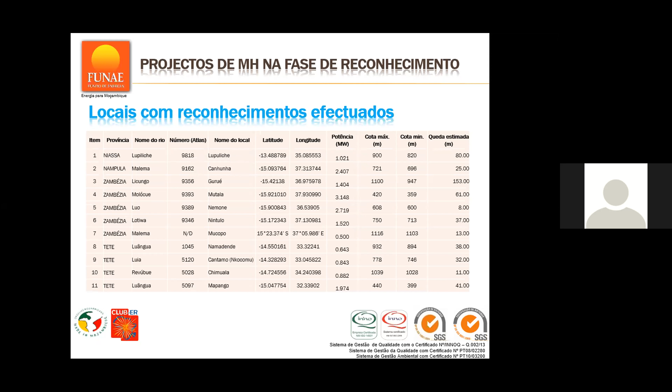Temos projetos com estudos de viabilidade realizados. Temos o caso de Mavonde, na província de Manica, no distrito do mesmo nome. Esse projeto foi desenvolvido sobre o rio Nhamucuarara. Espera-se uma potência prevista de cerca de 900 kW. Aproximadamente, os investimentos previstos, segundo o estudo de viabilidade, são de cerca de 7 milhões e 500 mil dólares. Este projeto está em carteira, o estudo de viabilidade já finalizado, e aguarda-se a disponibilidade de fundos para o investimento.

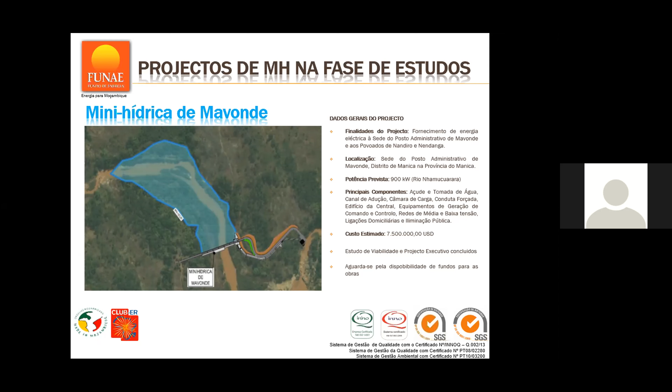Temos projetos em obras. Temos aqui um projeto que está sendo desenvolvido na província da Zambésia, no posto administrativo de Majaúa, distrito de Milange, com uma potência de cerca de 1,9 megawatts sobre o rio Ruo. Aí estão os principais componentes: açude e tomada d'água, câmara de carga, conduta forçada, edifício central, equipamentos de geração. O valor desta obra, que neste momento está em curso, é de cerca de 877 milhões de meticais. O empreiteiro é Soares da Costa, fiscalização da TÉCNICA, Engenheiros Consultores. Essa obra iniciou no dia 14 de maio de 2019 e prevê a sua finalização em 24 meses.

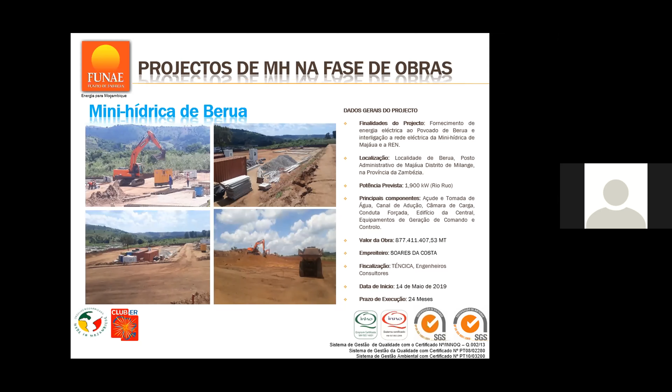Há um pormenor que me escapou aqui na mini hídrica de Berua. A mini hídrica de Berua está interrompida neste momento, porque houve situações de litígio com o empreiteiro que levaram à rescisão de contrato. Esses são os dados iniciais, e nos próximos meses vai ser lançado novo concurso para a construção dessa mini hídrica. Foi rescisão do contrato devido ao fraco desempenho do empreiteiro.

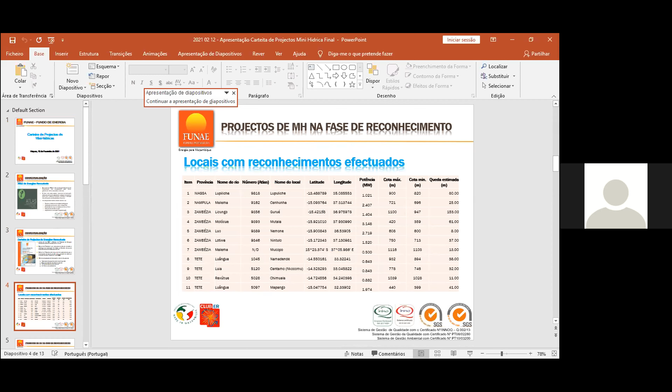Roberto, este campo é interessante. Eu queria também continuar algumas coisas. Por exemplo, estou interessado em saber um pouco sobre a mini hídrica de Sembezeia. Porquê? Porque parece que está muito avançado já. Inclusive, tem 67 ligações de beneficiários feitas. Falaste das unidades de mini hídrica, construção civil, e não sei o quê. Seria possível elaborar um pouco sobre a componente de quem faz as ligações para os consumidores? E não sei se te lembras, na apresentação passada o governo fazia estes projetos e depois lançava o concurso para serem geridos por investidores privados. Queria que elaborasses também um pouco qual é a previsão do FUNAE quando a obra está pronta, se já existe um plano.

Essa é uma questão também muito importante aqui. O FUNAE é uma entidade implementadora de projetos de energias renováveis, incluindo mini hídricas. O FUNAE faz a contratação de empreiteiros, faz a contratação de fiscais para a execução das obras. Neste momento não há nenhum instrumento legal que estabelece os modelos de gestão das mini hídricas. Então, neste momento, o FUNAE é que faz a gestão direta, ou seja, tem técnicos contratados pelo FUNAE que fazem essas atividades.

Mas, no futuro, provavelmente, poderá haver instrumentos que permitem a gestão através de privados. Portanto, não há nenhum instrumento neste momento, mas está na perspectiva do FUNAE privatizar os projetos das mini hídricas, terceirizar os projetos para a gestão de privados, ou também a partir do princípio do público-privado, por exemplo. Então, essas são as novas estratégias que poderão se estabelecer no futuro.

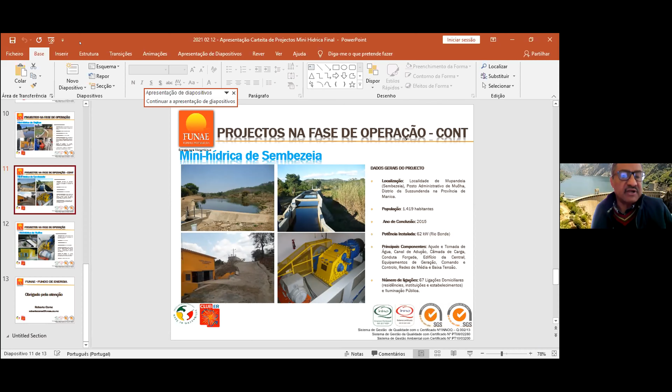Mr. Roberto, can I ask one question? Regarding your mini hydro project design, for example, you have a project called Berua. The capacity of Berua is around 2 megawatts, yeah, 1.9. So what is the design discharge? What I mean is, can 2 megawatts be generated, or 1.9 generated all 12 months, or in some months is it lower than 1.9? What is the water availability or design? I think in dry season, I recognize that this power will not be possible to generate. I think 1.9 will be the maximum power.

Okay, in dry season, how much? 50% or 70% of capacity? How much, more or less? 70, 50%? Okay, no, 70%. 70%. Okay, that's okay.

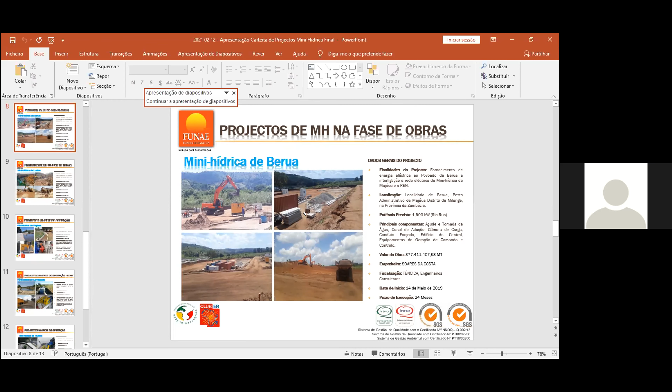But I think if you consider mini hydro, this cost is not so bad. The reason I say this is, last Wednesday we had a very nice presentation and discussion about tariff and mini grid. I think your mini hydro project, compared to the tariff that they presented, is quite, I would say, competitive. Of course, you have to do the detailed analysis: financial, economic, revenue generation, and all the cost. But it is not so bad. This is my observation. So do you agree?

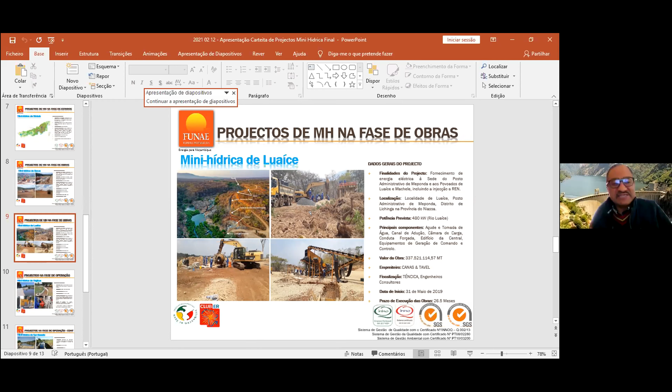I think we can proceed, Divas. Yeah, so let me just share some slides. This will just add to Mr. Roberto's presentation, which, as I said, I did not understand everything, but I find it quite nice.

Sorry, share the... just give me one minute, please. I don't know what happened. Okay, all right.

Okay, you can see my screen. Yes, Divas, okay, thank you. Today, I mean, maybe we have 10 minutes before we end the first part.

Thank you, Mr. Roberto, for making this presentation on the project portfolio, the FUNAE project portfolio. It was very useful. I just prepared a few slides on this. Mr. Roberto, this report I found on the internet - is this the same project portfolio report you referred to in your presentation?

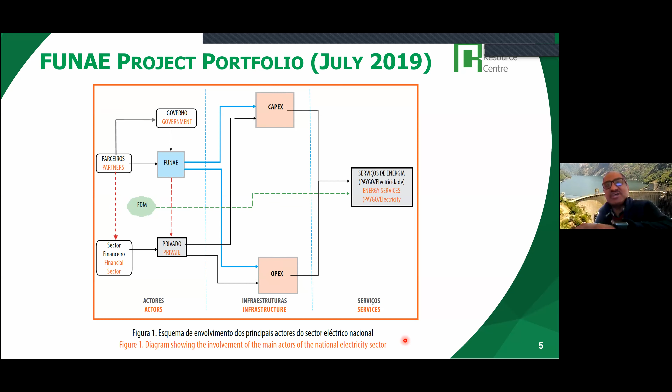I also collected the list of baseline projects - 5 projects with pre-feasibility study, 2 projects with feasibility study, and 2 projects in the Atlas which are now under execution. Basically, from this, they were focused on some provinces - I think it was given that there were 5 provinces - but I just put these projects in the portfolio on the map of Mozambique.

If you noticed, the background map is the elevation map, because obviously for mini hydro you need some head, an elevation difference. There are a number of projects in the Zambezi river basin part of Mozambique, shown as red dots. The blue ones are the two projects - Luahi and Berua, forgive my pronunciation. The dark black ones are the projects with pre-feasibility.

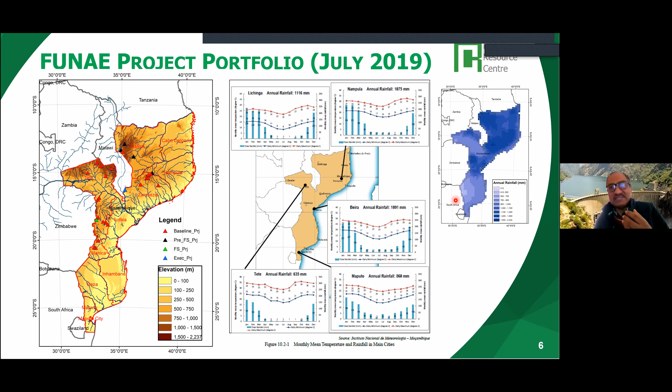So this was the list I got, and as I mentioned, the per capita cost of these 2 projects was for the mini hydro, 5,600 and 7,400. And I noticed there was one big project, I think Mr. Roberto presented, where the cost was much less. But you see, when it's a small project, the cost in the feasibility study is quite high. I'm not sure, maybe this cost also includes the mini grid.

Yes, it includes the mini grid. So this other one probably does not include the distribution network. So this is something that now is a policy regime that has to be decided. I just wanted to present that to you.

Based on that, I think we are running about 1 hour. Maybe we can break now, but based on Mr. Roberto's presentation and some slides, I just wanted to ask randomly: what do you think should be the criteria for selection of these mini hydro projects for prioritizing them? You have 31 more. This is also important. Maybe we can break for 10 minutes, then you can think about it, and when you come back we can spend a few minutes on this criteria. Is the criteria that was given good enough?

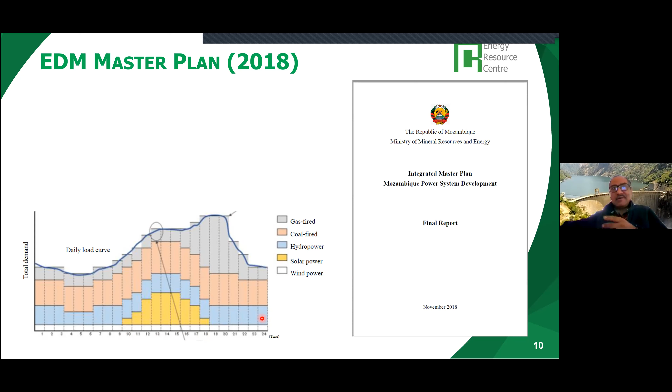And now you are meeting the peak load with gas-powered fired plants, but also the other loads of peak. You also have coal-fired plants meeting this. And you have hydropower here. So at the moment gas and coal is the majority, and this is the solar power which starts from 9 o'clock to 5 or 6 o'clock. So this is the sort of economic dispatch, what they call it, okay?

And this is the existing power generation from hydropower. According to this report, you have Cahora Bassa, Chicamba, Mavuzi, Corumana Hydro, and Cuamba and Lichinga. But I think Cahora Bassa, the majority of the flow is exported to neighboring countries.

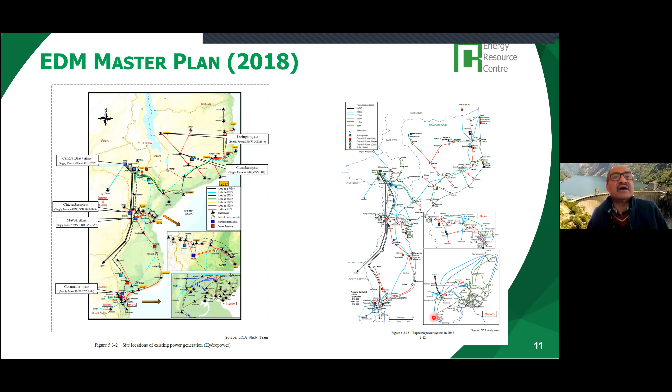So this is by 2042, they have a master plan. This is how they see the power system will expand. And this is the different hydropower projects under construction or completed feasibility studies. I think they have some extension, a second phase of Cahora Bassa. This is the Cahora Bassa description.

Different generating capacity, and I think this is the project that is now under construction, I don't know, Mphanda Nkuwa, and they have this. So these are projects with reservoir storage, and probably this project is under construction, and according to the schedule it is supposed to be completed by 2024. This is a reservoir probably in the Zambezi River Basin. Okay, so it is 1,500 megawatts, relatively large, and it's basically used for base load, it says.

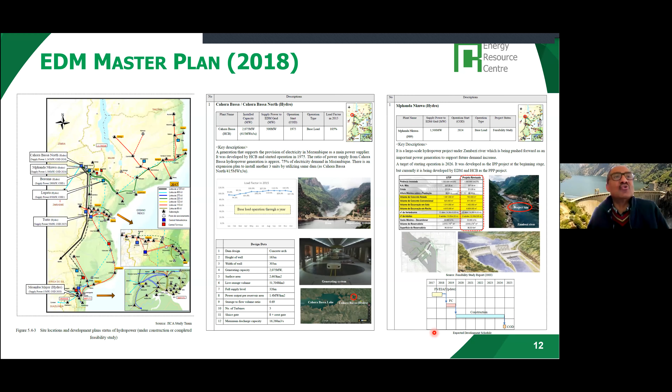Okay, so I just wanted to give you an idea of the overall master plan, and as I mentioned, the load varies from weekday to Saturday and Sunday. So this is 2016, and as I said, normally you have this solar thing. This is the load curve, and solar is in the afternoon. So you need the other sources of electricity like hydro and even gas fired.

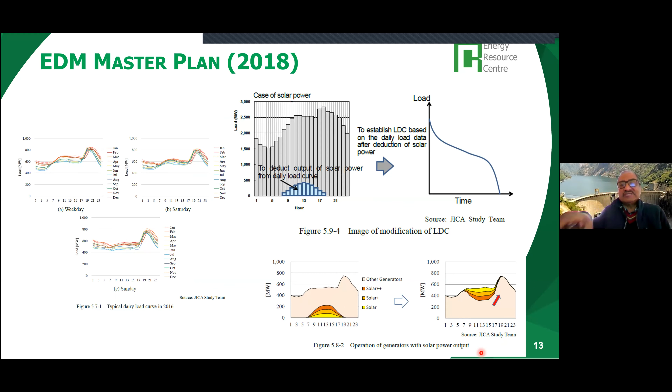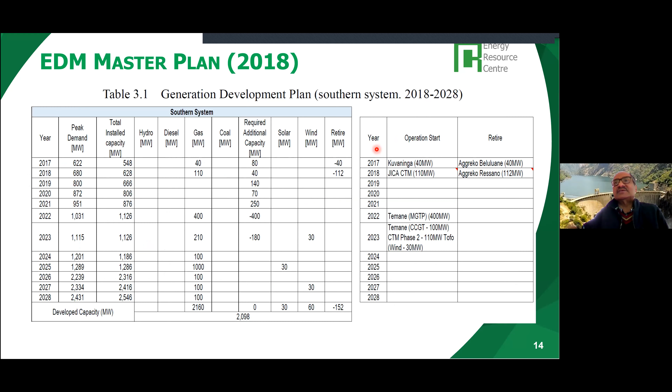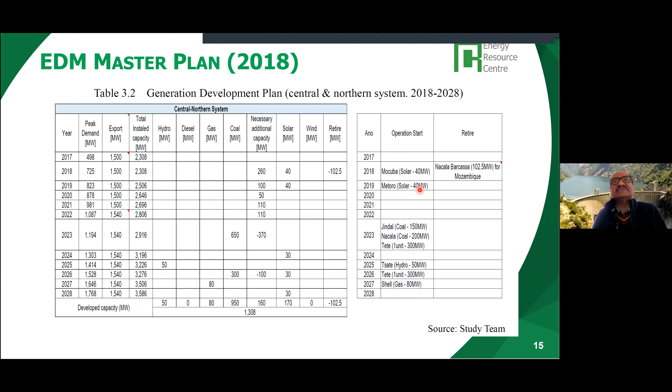And now, by 2029 I think, they want to do a second phase of Cahora Bassa here, and they want to get the funding for this big hydro project.

Sorry, somebody shared. Can somebody share?

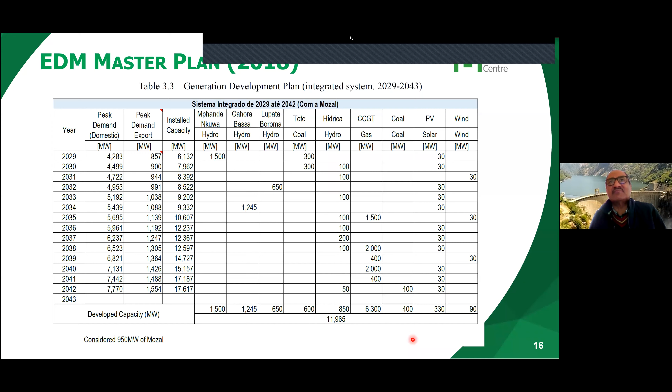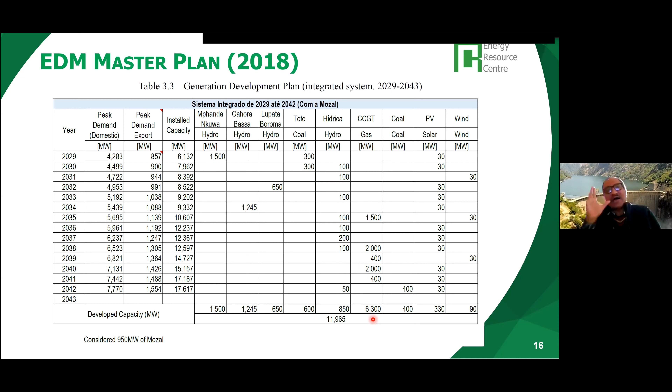Okay, so this is just to give you an idea of how Mozambique is planning their generation development. One thing I want to mention is that the development of mini hydro, mini grids, and the national power system is slightly different. So I just wanted to bring that background.

With that background, I wanted to get your views based on the discussions we've had till now. What do you see as the role of hydropower in meeting the national electricity demand? This is about grid connected systems. The second question is: what is the difference between developing a hydropower for grid connection versus developing a mini hydropower for a mini grid or an isolated system? Do you have any comments on this?

Carlos, was my question clear? I think so, I think it was clear. Of course, I can start.

Yes please, discussing this, I think it's two key questions. Mini grids can be a good source if you know that the river system you are using does not fluctuate very much and does not depend very much on upstream consumption.

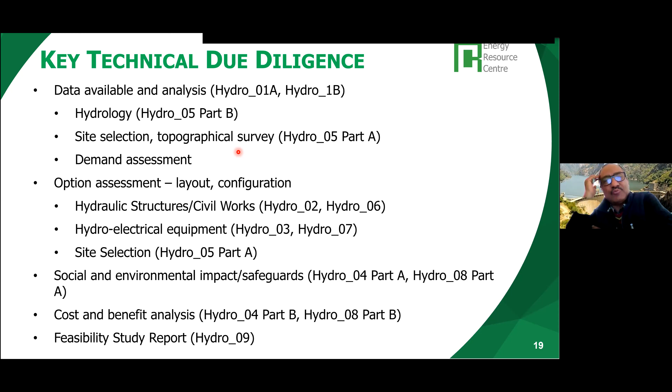Then the other thing is the topographical data, because the topographical maps currently available are at best 1:250,000 scale with contours. This is low resolution. So even for planning-level desk study purposes for a hydropower project, you need at least 1:20,000, or in the worst case 1:50,000, just for planning purposes.

But when doing site selection and a detailed feasibility study, you have to do a topographical survey yourself with theodolites. Nowadays you can even use LiDAR mapping, drones to develop these, and GPS can also be used. So topographical survey data and analysis is very important for site selection as well as design. I covered that in Hydro 05 Part A and B.

Demand assessment is also very important. I covered that in Hydro 05 Part A, I forgot to mention here. As was done by FUNAE, you have to identify the population it can serve, the number of connections, the potential demand, and the commercial, rural and industrial demand. In the national grid, demand assessment covers large industries, tourist services, offices and hotels. But for mini hydro and small isolated hydro, it's rural industries, small scale mining, carpentry, furniture, ice plants, agro-processing plants and other things.

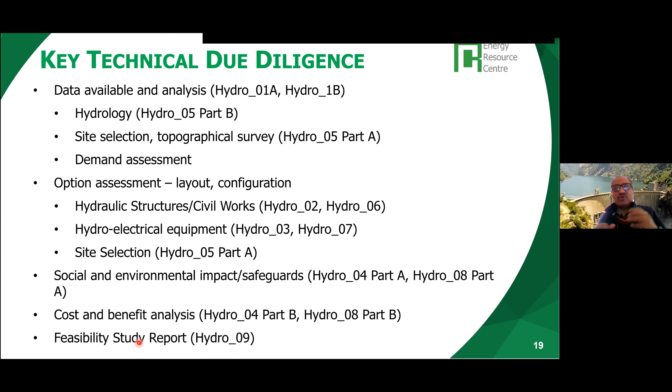And I covered this in the Hydro 09 lecture session. So when you are doing the key technical due diligence, you have to make sure that the data availability, option design, social cost, and feasibility report are properly prepared. This was basically covered.

Based on the technical components, I'm just referring to my presentation 01A. As I mentioned, the headworks, powerhouse generating, transmission, distribution, end use - all these design aspects has to be at the feasibility study level, which was covered in the presentations I made earlier.

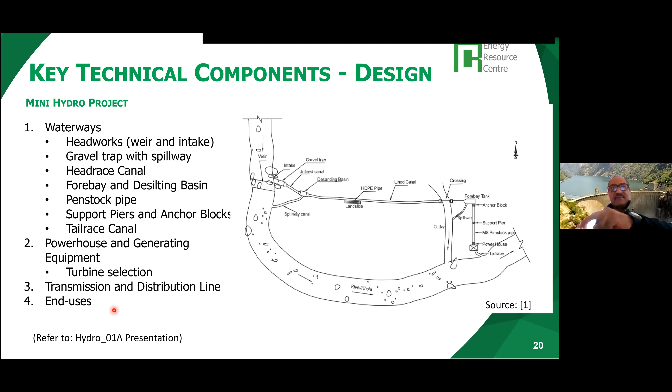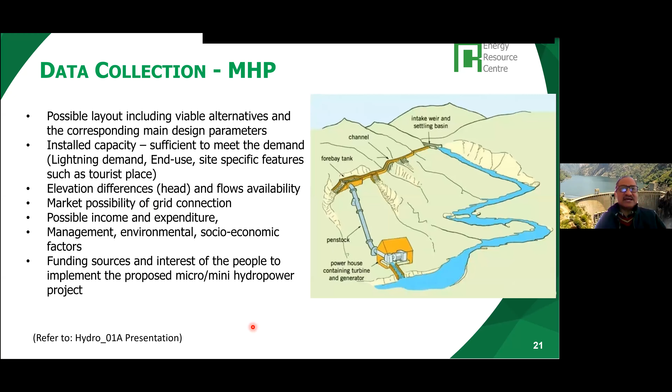The data collection also, I'm just referring to the thing. We have to look at the possible layout from various things. What should be the installed capacity? This depends on two ways: one, depends on the demand, and also the water availability. What should be the design discharge? I'll talk about it later. The head, the market extension, grid connection - later on, if there is a grid connection, how it will be managed. So these are other aspects of data collection that needs to be done.

The site selection also was covered here. In the reports that you are evaluating, the portfolio, you have to make sure the flow and head is reliably estimated, and that the site alignment is done correctly.

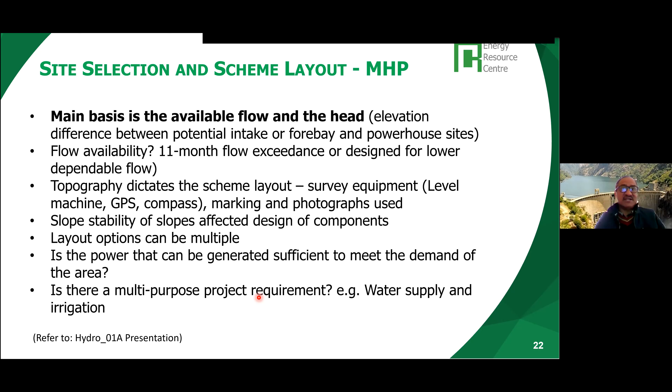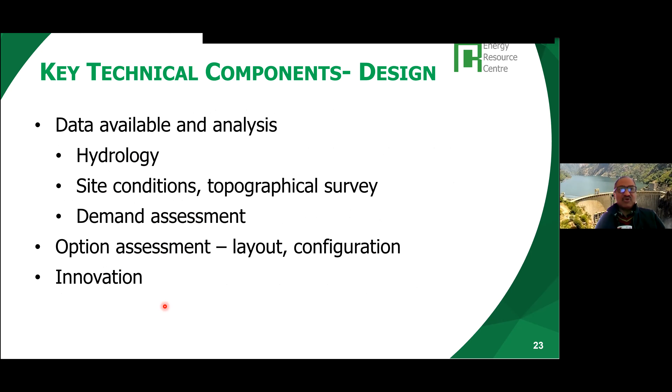So regarding the design, data analysis, as I mentioned: hydrology, site conditions, demand assessment option is there. And also nowadays, we should try to look at some innovation, because now it's getting very competitive. The cost of other renewable sources are reducing, so we should make sure we also find innovative solutions to our design.

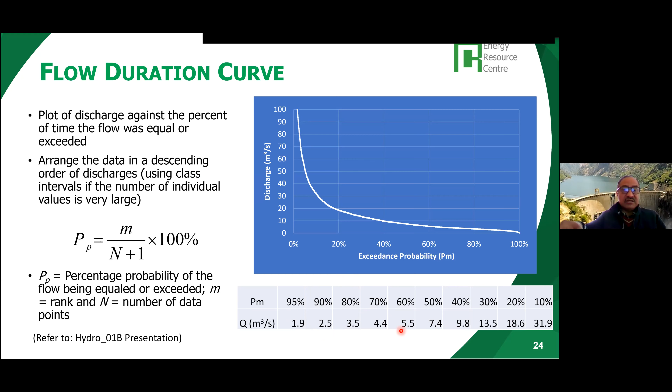Design discharge - if it is mini hydro grid with no sources of electricity, then you have to design for a lower discharge, but which are more reliable. But if you are doing it with a hybrid system with hydro and some other sources of electricity, you can design it in this range. So this is the selection of the design discharge - a good example of technical due diligence.

Similarly, the flood - we have to make sure that the data we use for the flood analysis is good, and that we estimate the design flood correctly. So this is also a very important thing.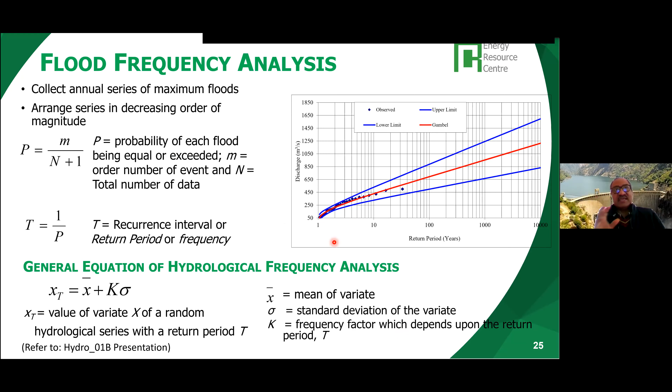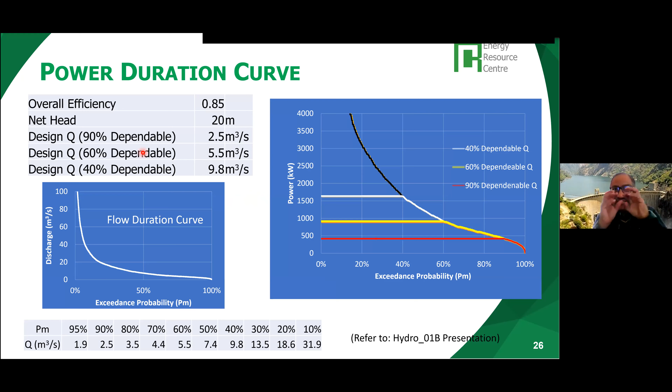I was planning to, maybe next class, go over one short exercise on calculating the flow duration and power duration. But at the moment, I would just limit to this explanation. So this figure is very important for the hydropower project design.

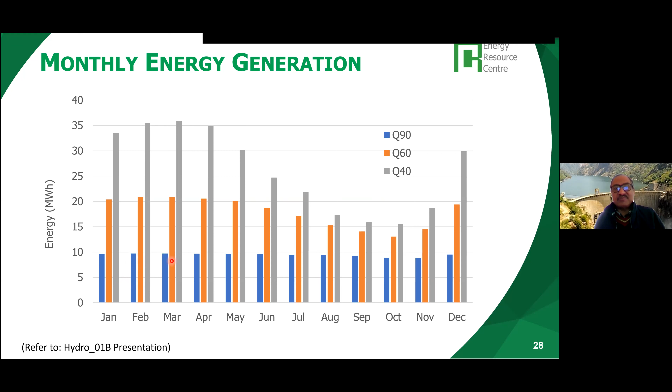And based on that, what happens is, if you design your project for Q90, the install capacity, as I mentioned earlier, is less than 500 kilowatt. If you design this project for install capacity... sorry, if you design the project - sorry, my computer is getting a little bit slow for some reason.

Okay, can you see my slide? Yeah.

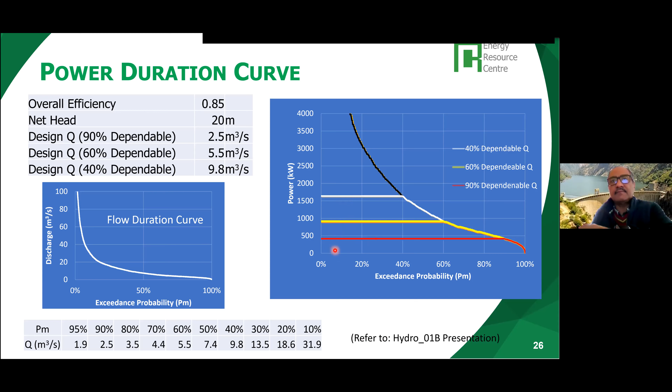So you can design for less than 500, less than 1,000, or more than 1.5. If you design for Q90 for less than 500, the blue line is the energy generation, and it's the same every month across 12 months.

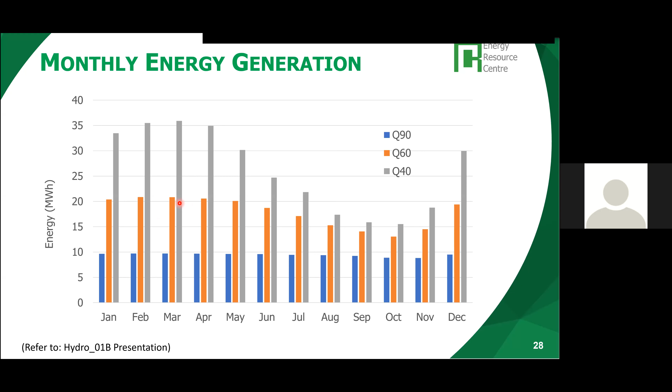But if you design for Q60, less than 1,000 kilowatt, the energy generation will increase, but during the dry season of July, August, September, October, you have almost 50% of the energy you have in that period. And if you design for Q40, you get a peak in February, March. The capacity is less than 1.6 megawatt or so, but the capacity and energy drastically reduce in those months.

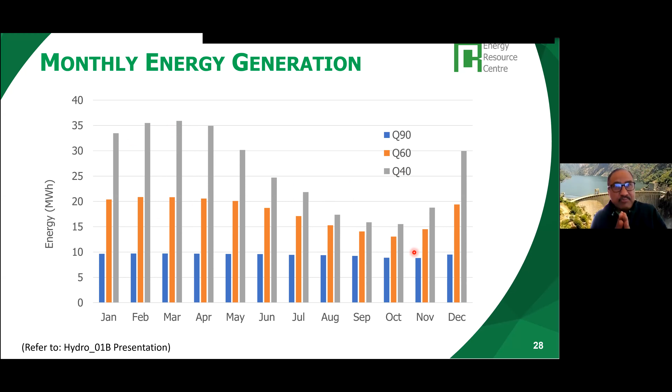So this optimization of the capacity is an important part of the technical due diligence of any project.

Okay, so now I want to come to an end of today's session, but before we close, I want to get your views on what technical areas or revisions related to the mini hydro project were presented. We have two more sessions next week, Friday, and the last week we'll have a combined session. I think we received some questions from you on what you want to cover in the combined session, so I'll cover that in the last session or maybe a bit in the next one. Is there any particular area you want to review, like design of civil works, design of any structure, the hydrological and demand assessment, energy generation calculation, cost benefit analysis related to mini hydro, or social and environmental impacts? I just wanted your quick thoughts on this.